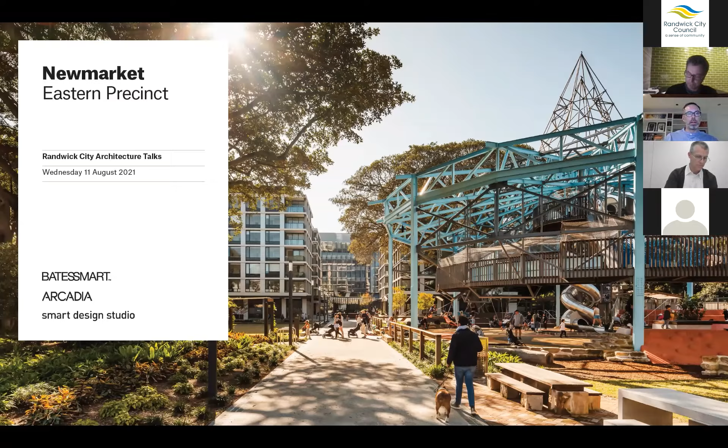Just bear with me. I'd also like, before I start, to acknowledge the traditional custodians, the traditional owners of country, in particular the Gadigal and Bidjigal peoples who traditionally occupied the Sydney coast.

I'm sure as locals, most of you will know the site reasonably well. For those that don't, Newmarket is the site of the former Inglis stables, just on the southern edge of the Randwick Health and Education Precinct. The hospital's immediately to the north, and you can see where we're in South Randwick, halfway between Moore Park and Coogee Beach. The site has an incredible history of horse racing and these magnificent fig trees, many of them planted over 100 years ago, and this equestrian history and the magnificent landscape really impressed upon us early in the design process.

As I said, we've been working on the master plan since 2016. This is a site plan showing the whole of the master plan, of which what we're talking about today is the first stage. Here you can see Barker Street to the north, Randwick Girls and Boys High to the east, Avoca Street just off the page there to the right, Rainbow Street Primary and Paine Reserve to the south of the site, and Botany Street running north-south on the left-hand side of the page.

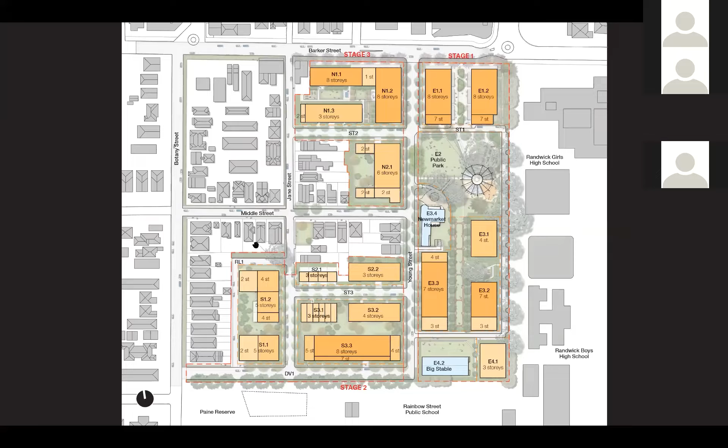The site was master planned in 3 stages. The first stage, coloured here, the Eastern Precinct, is the one that's been completed. That's what we're mainly talking to you about today.

The second stage, which you might have seen, apartments are currently being sold for, runs down the new street, Fennelly Street, to connect into Botany Street. The final stage, where the existing sales suite is, will come online in future years.

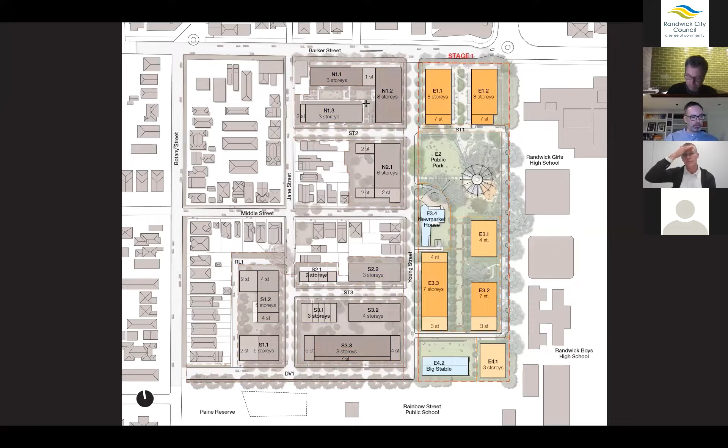I'm just going to take you through a few diagrams which shape some of the key moves of the master plan. This drawing is now turned around 90 degrees, confusingly, so this is just looking at the Eastern Precinct now. Barker Street is on the left-hand side of the page, and the Rainbow Street Primary is on the right-hand side.

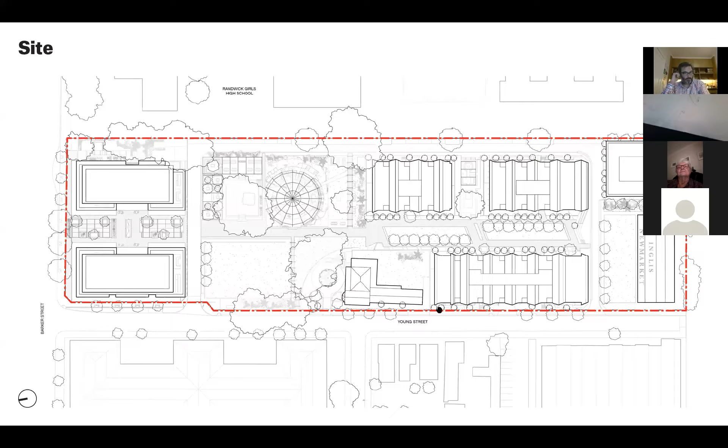The key things that really influenced our master plan thinking are set out on these following diagrams. The existing trees I mentioned earlier are all absolutely incredible, a mix of figs, a Norfolk Island pine, scattered around the site amongst the existing buildings. You can see those all coloured here in green.

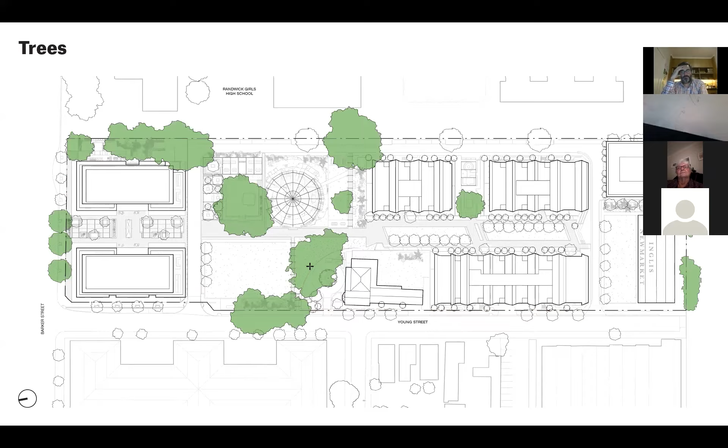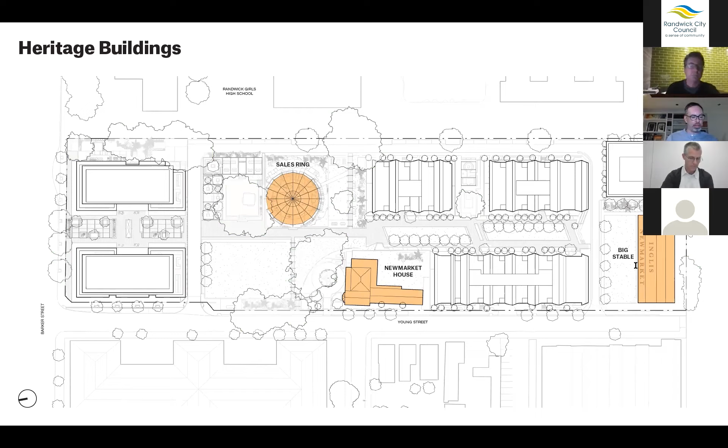There are 3 important heritage buildings within the Eastern Precinct. They're coloured orange here: the sales ring, which Alex will talk about in a bit about how that's been repurposed into a playground; Newmarket House alongside the new park; and the big stable down the south end of the site.

Down at the south end of the site, the third building, the big stable, is a magnificent space. For those who have been fortunate enough to be inside, it's a really expressive open structure. Council are currently working on what the future plans might be in store for that.

Going back to our diagrams, you can see here the same setup, the trees, the heritage buildings. One of the key planks of our master plan was how to get cars in and around the site and how to give addresses to all of these buildings.

So we proposed a loop road that comes between the park and the dining precinct, wraps along the eastern boundary and then returns back to meet Young Street alongside the big stable. This new street gives vehicle access to the front doors of all the buildings on the rear boundary and could in future provide further connections and openings into the schools.

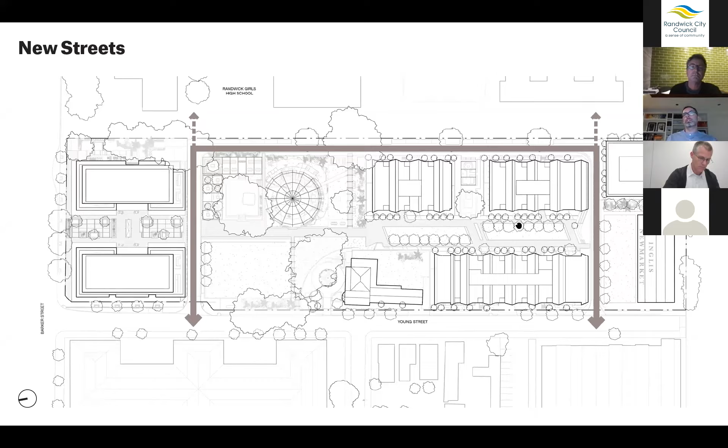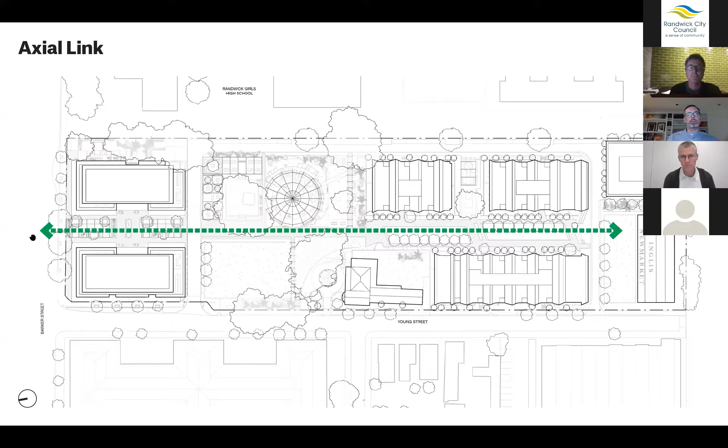That vehicular link is coupled with a strong pedestrian axial link, which provides a clear sight line through the middle of the site, all the way from Barker Street down to the big stable. One of the key moves of the master plan was using that link to provide a series of very different public spaces, each with their own character.

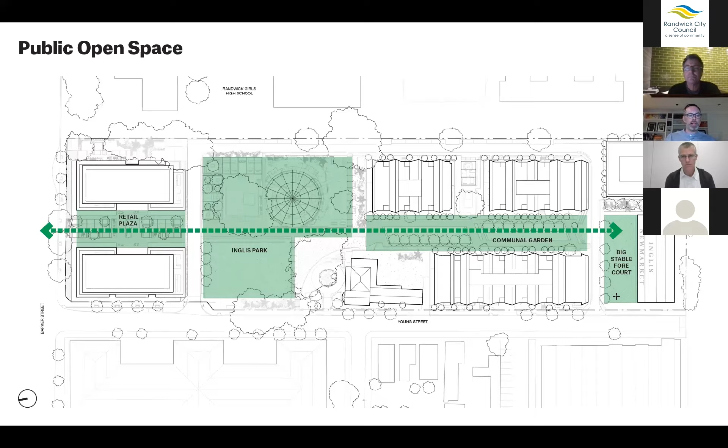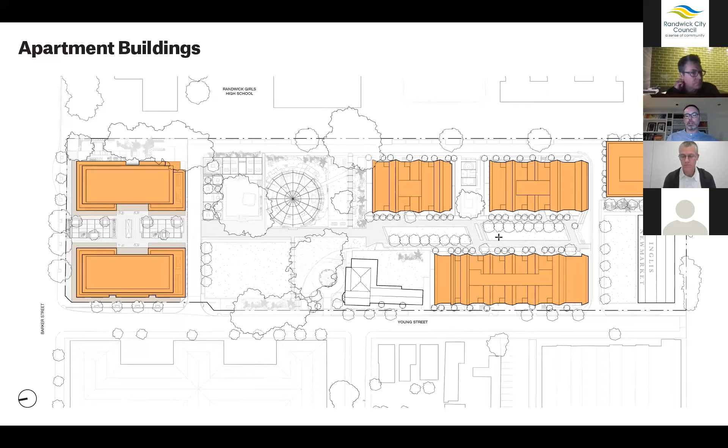And then finally, the massing of the apartment buildings on the site. What we did is arrange all the apartment buildings either side of that central axis, and then we reduced the heights of the buildings alongside all the heritage buildings to address those existing buildings in a more sensitive way.

Now, just before I hand over to Alex, who'll go through all the landscape spaces in a bit more detail, I just thought I'd give you a couple of images to put some of those master plan moves in context.

Here we are standing at the south end of the park, looking northward towards Barker Street. You can see the big stable in its current form on the right, and the dining precinct to the north. That's the sales ring playground Alex will talk to, and then just another example of where the heritage structures and the heritage trees have really been brought together and celebrated.

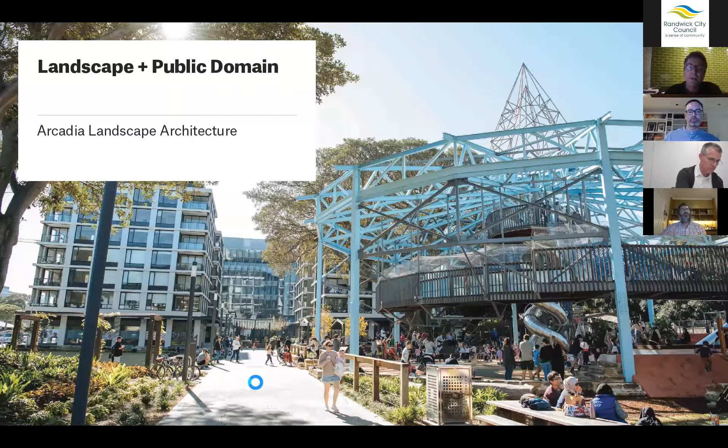Alex, can I just ask you to lean forward a little bit and speak up? Yeah, thank you. Right, yep. People are having trouble. That's it.

Right, thank you. As part of our design journey, we spent a lot of time doing research, and with the work of some historians and our own research, we started to unpick the very diverse amount of elements that sit on the site, apart from the three main elements in our first stage, and the variety of different equestrian uses that were so predominant on the site. As part of the construction programming and excavation process, there was a historian on site for the entire dig.

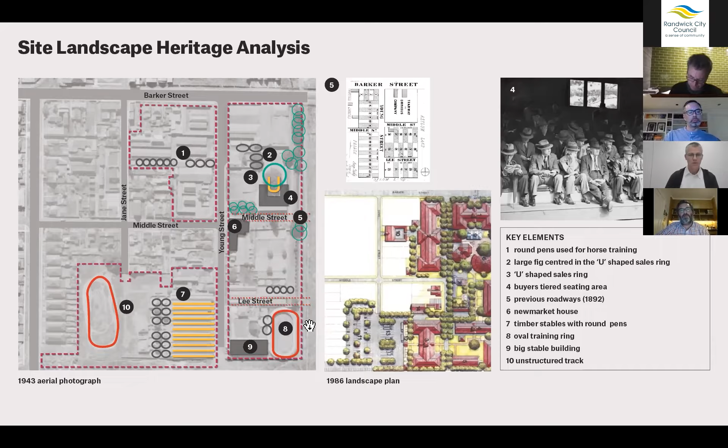That's where some of the bricks you'd be familiar with on the site were discovered. Down here in number 8, at the bottom right-hand side of the page, as an example, some 1 meter below the existing level, we discovered that red ring actually had buried bricks down there, some of them even containing convict stamps. So all these heritage elements became very important for us to discover and then reinterpret.

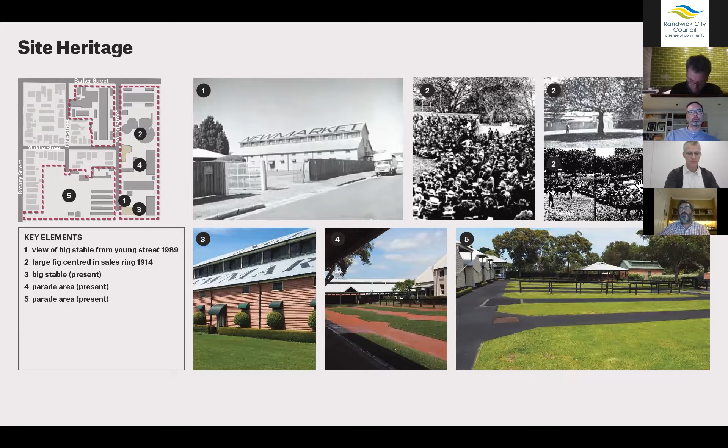Part of that is the architecture and the typical architectural form that the stables had driven out. The parade grounds are also a significant element of what the equestrian heritage drove out. And then, probably the most significant heritage item on the site, in our opinion at least as landscape architects, is the central fig that sits now proudly in the middle of the park and is its cornerstone. It was planted over 112 years ago, and it's witnessed the sale of every horse ever paraded within these grounds and sold under the hammer. So its structure within the park was essential to really celebrate.

Notwithstanding that, the Inglis's, whilst the site was contained and fenced and only for private use the majority of the year, when those fences opened up and the public could come through, their home and garden became part of the public space for those few days of the year. But also importantly, what was very noticeable was that whilst fences surrounded the perimeter of the site, they always visually allowed for permeability to come through.

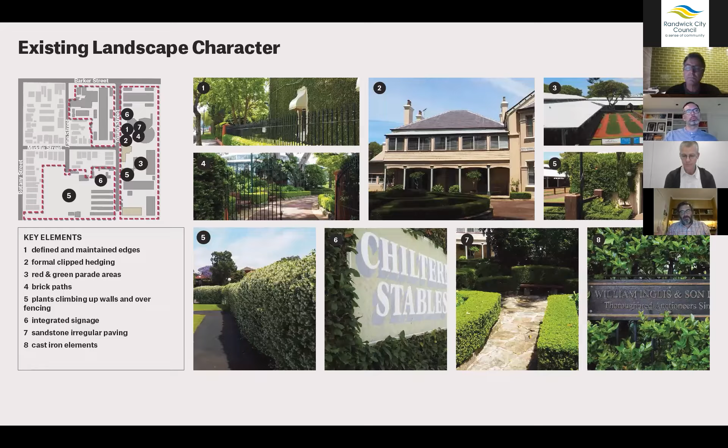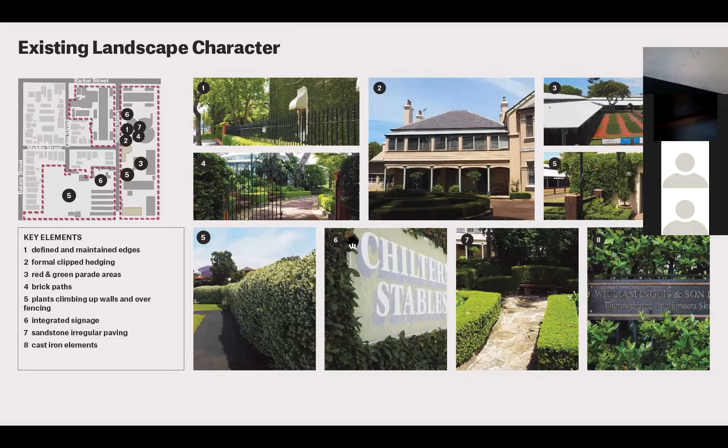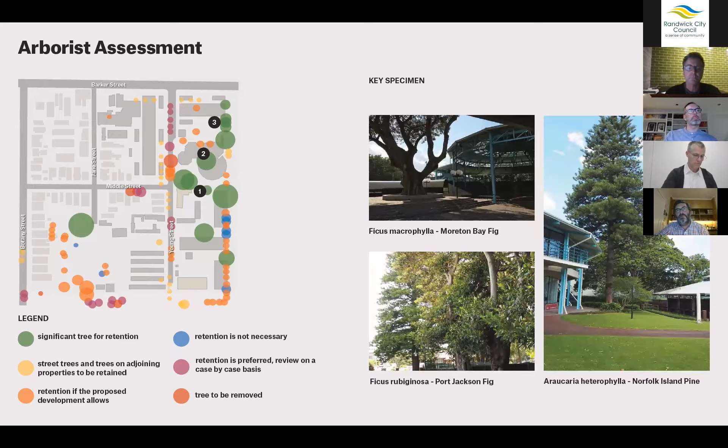Matt touched on the existing trees scattered around the site. There are 15 heritage listed trees, a mixture of figs and Norfolk Island pines. Every one of those has been planned to be retained. We've stepped basements around them and done everything possible to ensure the planting allowed for their retention, so these iconic components really became cornerstones of the overall development.

From a master plan level, we looked at probably four main pillars. The connections, both pedestrian and vehicular - there's a series of new roads that come through the space. Accessibility - believe it or not, there's something like a 1.5 metre fall from Barker Street down to the park, and even through the retail zone there's a reasonably tricky fall. So making sure we didn't impose handrails through there was part of our design process.

Obviously the heritage reinterpretation took on a very important part of the design, creating a defining character that not only tied the site together but created a new precinct for Randwick. We are in quite close proximity to the Spot and to Randwick Junction, and we needed Newmarket to take on its own life and its own sense of place.

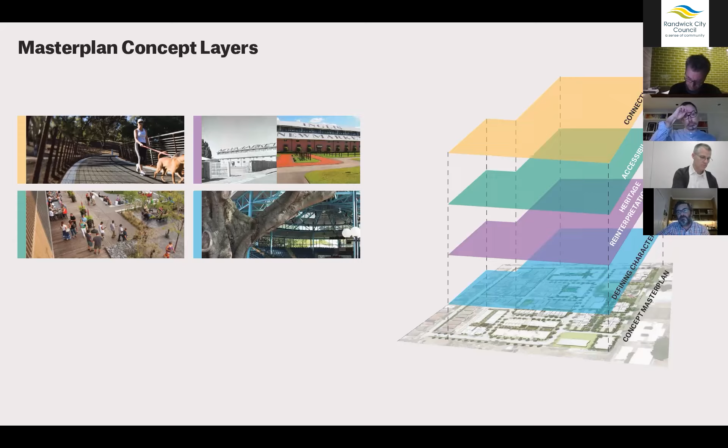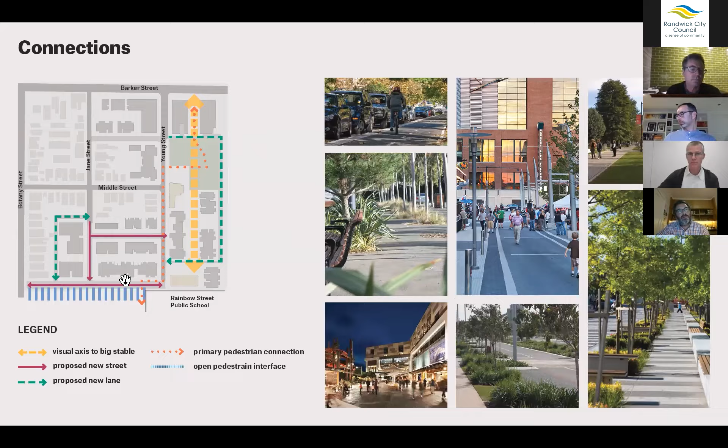In terms of connections, we have this main pedestrian spine that heads from north to south through the centre of the site, which is really how we see the public navigating and enjoying the different types of amenity. There's the new road that loops around stage 1, and on the stage 2 side we have the new roads in purple that have already been constructed, which you may have driven around yourselves.

In terms of the spaces, the blue here signifies publicly accessible open spaces, and I think it's a credit to the developer and their position in reinforcing and encouraging the publicly accessible components to this site. It's not very often that the areas between buildings, say for Williams' component in E2, 3 and 4, would be open to the public in the nature that they are. But it has allowed the landscape to flow quite naturally while creating significantly unique spaces - the heritage components, and the semi-public accessible spaces in front of the existing big stable.

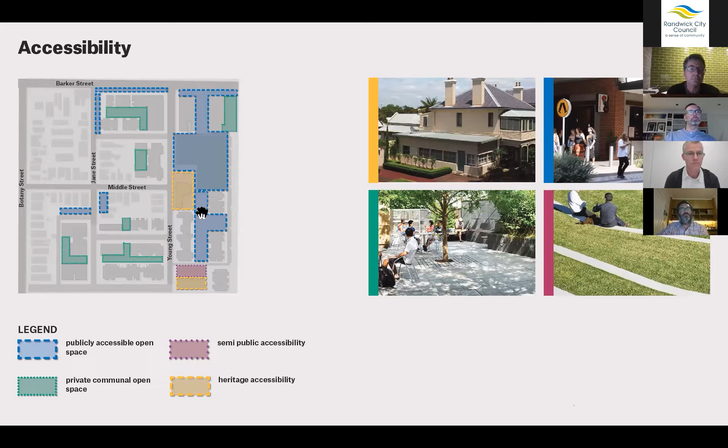In terms of the heritage interpretation, we were blessed with probably five main elements that we really enjoyed working with: the architectural forms, which we adopted as part of our ground plane treatments and definitely the structures that sit within the park.

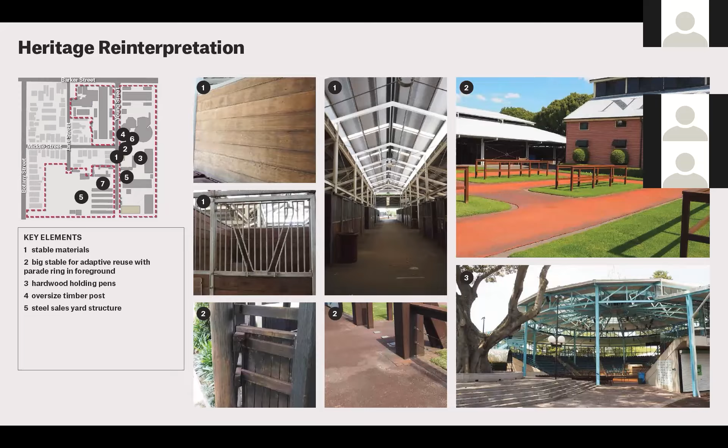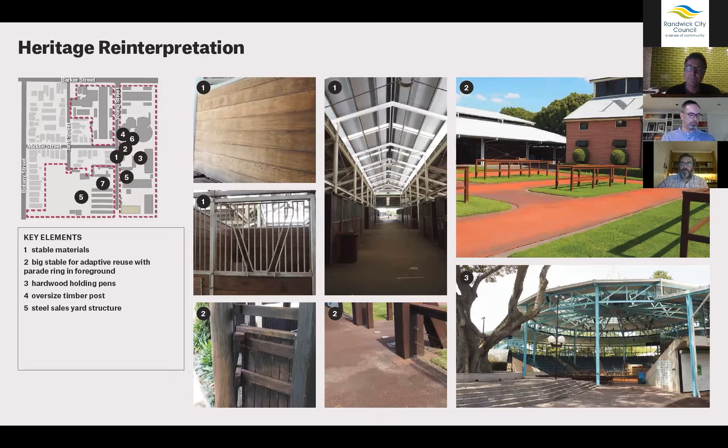The timber was a very strong component of the stables that existed, both the old and new stables, which was salvaged and recycled. The bricks from the stable floors where the horses walked were all salvaged too. Then as part of the civil works within Young Street itself, during removal and upgrading of the curb and guttering, council requested us to replace the gutter but retain the old sandstone heritage curbs. We picked up almost 1.5 kilometres of this sandstone, which allowed us to introduce it into the framework of the park itself, which you'll see later on.

Placemaking and activation - we've got a very busy pedestrian driven Barker Street with high velocity traffic getting in and around Randwick, but also leading to the hospital entrance directly across the road, universities down the street, and local schools, coming through into the middle of the two buildings on Barker Street, where we have these focused social zones that then bleed into the park.

We'll explain how our thinking was approached there in terms of not having the park and that retail component be two isolated elements - we wanted to stitch them together so they'd be expansions of one another. The community gathering and recreational space is the big lawn in the middle, and then the local shared spaces are scattered around in the blue.

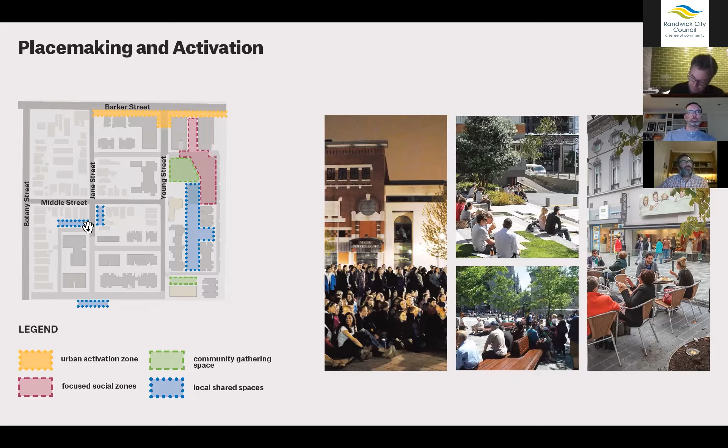Vegetation character - so this is really just looking at the different approaches to the central park and social spaces versus Young Street and Barker Street, and then the new streets that have been planted up.

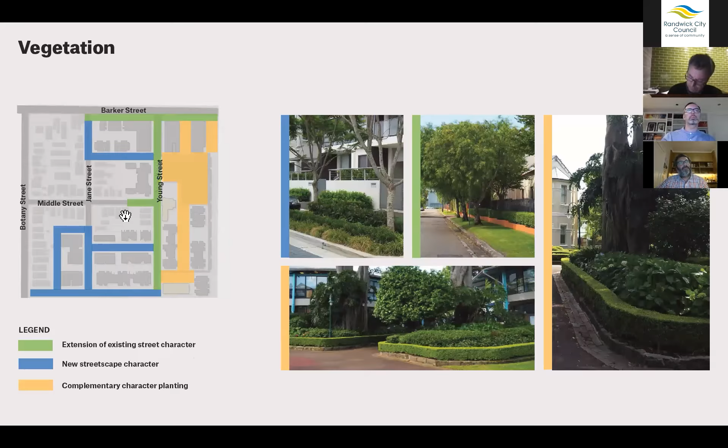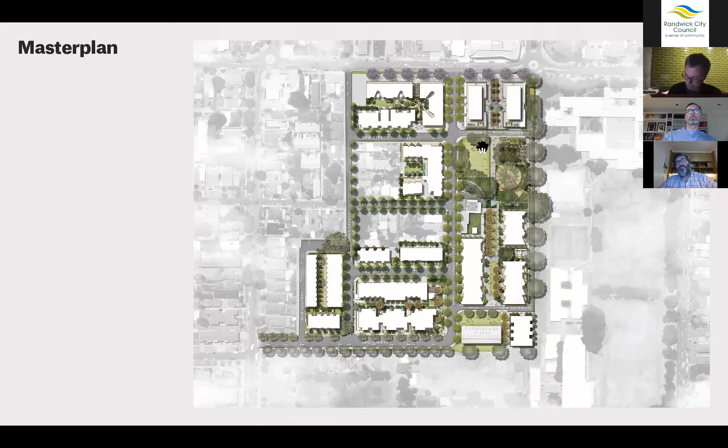So this is the master plan as it sits today. You'll see in some of the future slides the actual form of the plans at different stages of our design development. I think it's important for us to acknowledge as designers that what we present at different stages isn't fixed in concrete. For good reason, through collaboration with council and other designers that come into the project through its life cycle, there's an evolution. This is pretty true to what's represented on the site today, and you'll get an understanding, especially around the park, of where some of the line work has evolved in the future stages.

So on E1, the retail precinct itself, there are really two main components. There's the publicly accessible component on Barker and Young Street, where we've provided pedestrian connections as a primary driver, and tried to create really high quality al fresco dining amenity with the use of shade structures and the like that would allow the success of the F&B retailers to spill out and activate those edges well.

The central food and beverage precinct worked quite heavily to make sure that whilst it serves a purpose for the retailers to expand their floor plates and trade, providing service and amenity to customers in an outdoor experience, there was a significantly high proportion of public amenity so that diners, say getting a burger from Cafe Mackenzie, didn't feel excluded from using this space. The furniture layout and fixed furniture assisted us in making sure the spaces aligned with different retailers are very clear - they dress those themselves every day, bringing in their own furniture and character. But the rest of the amenity is clearly for public use and general public amenity, allowing people to come through so it's not an exclusive place just for dining.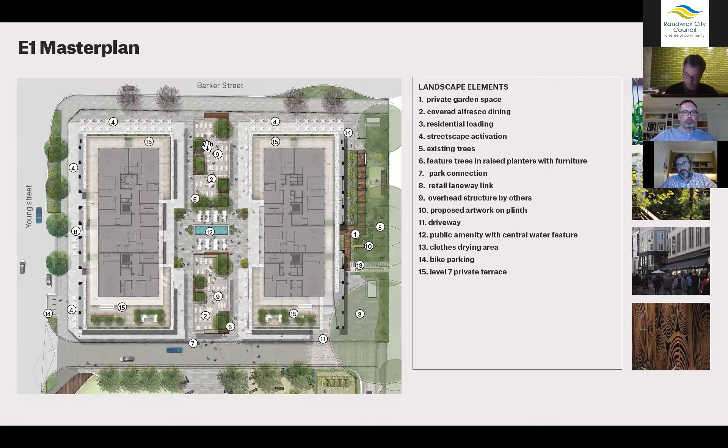The awning element over the top, I want to make some reference to, because Arcadia - whilst we were involved in the planning of all the seating and everything underneath it, we collaborated, but mostly it was designed by HDR. For the public, to understand what it signifies - the cones underneath it are the horseshoes, and the movement underneath represents the sand dunes that once occupied the site. So there's that touching back on First Nations people's knowledge and experience of the site, using it as a very modern, slick element that provides fantastic amenity for diners in all seasons.

And as the Inglises start to come into place, there are some colours of the horses. What's important about that is this isn't a place where jockeys or trainers were celebrated, that's the track. This is where the horses were sold, so it's representative of the studs, I suppose, of the industry, and those colours represent the studs and racing colours the horses then went on to use. As part of that interpretation, each building has been aligned with one of the predominant horses that Arthur Inglis and his family assisted us in selecting, and they're scattered throughout the ground plane of this landscape.

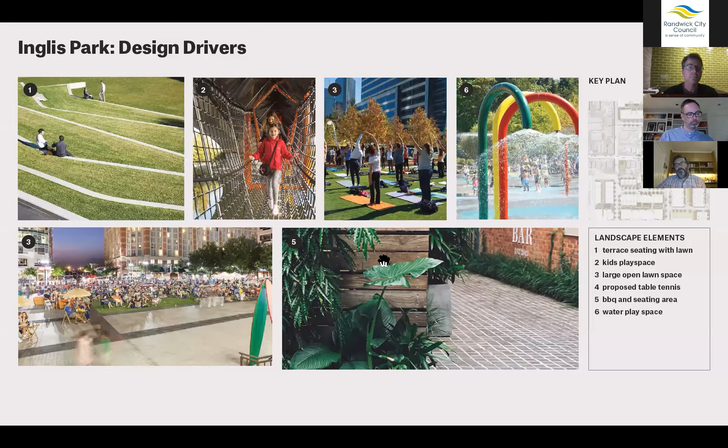So if I come into the park itself now, the design drivers were basically to create a large lawn space that provided passive and active recreation, a place for kids, a place for flexible community gatherings, barbecue amenity, and an extension of the food and beverage area, and then general play.

Within the site, the main drivers were these fantastic canopy trees that existed on site. We have the main fig that sits in the centre of the site. Adjacent to the Inglis house there are two other figs sitting within the park itself, providing amenity to the house and that edge of the park. The standard camphor laurels are along Young Street, then other figs on the edge of the school, and just to the south this smaller lighter green symbol represents the Norfolk Island pine that's on the site at the moment.

The structure of the site itself, when we first saw the sales ring, I'd actually seen it for a fair few years before, but Mike, my business partner, and I looked at it, and it was the biggest puzzle of what we could do with it, but it had such a strong presence that it needed to remain and be retained in some form.

And I think whilst it's been discussed as heritage, I wouldn't say that it's got architectural heritage value, but in terms of its cultural value and cultural heritage, it holds a great deal of importance, especially to that community that had passed the baton on to the next group. So retaining that for us was very important.

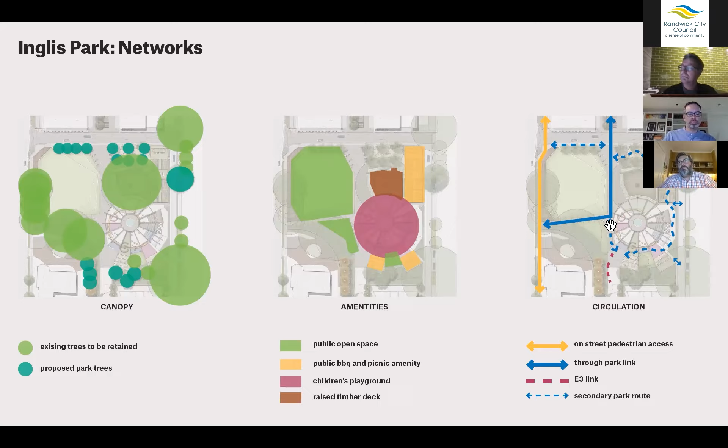Not without saying that the circulation in and around the space is very important. One of the challenges we had was to retain the structure, and some of those bleachers that create the elevation and height, was ensuring that we provided a safe space for all days of the year and all hours of the day. And whilst the lighting does some form, I think we've opened it up significantly so that there's no little nooks or crannies for any sort of opportunities for predators of the like either.

So we've got the main pedestrian spine, I think it's 4 meters in width. It connects the north to the south, but also this east-west connection that comes off Young Street and sits right in the centre line of the axis of the centre of the play structure.

The raised deck around the FIG itself. The FIG sits at a slightly higher level than the adjacent surfaces, so we needed to treat that with its due requirements to make sure it had a healthy and well aired soil base.

And then wrapping around that is the L-shaped food and beverage or park dining amenity. And the first one that runs on the east-west axis adjacent to New Shareway is what we envisaged to be, and it's funny how things work out for you, we saw that being the spill out space. People would go to the different restaurants with their friends, and someone would go to the dumpling place, someone would go to the cafe, someone would go and get a slice of pizza from Barca, and they'd all come here, grab a bottle of wine from Stella, and sort of sit there.

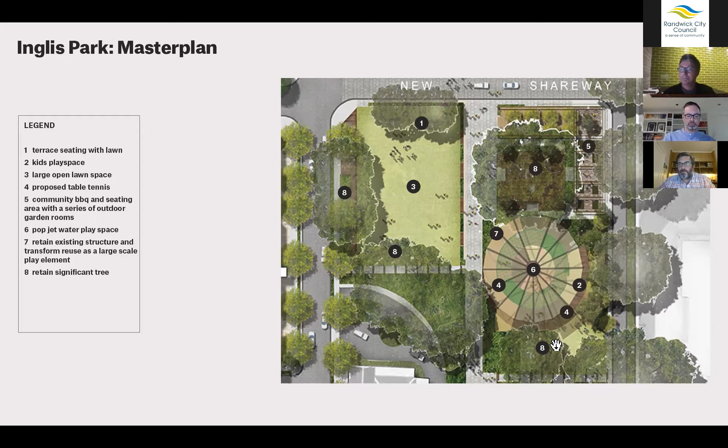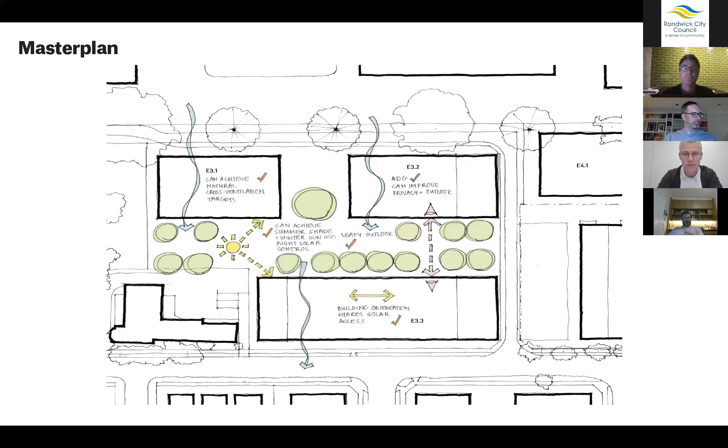Good evening, everybody. I'd just like to present a little bit about the Fig Tree Pocket. The project really started with us being very mindful of the amount of amenity available on this site and how we could connect in with the gardens.

What we were really thinking about is the rising sun in summer and winter and how you could use that and the architecture to control the amount of summer sun coming in, to limit that, but to allow the winter sun in.

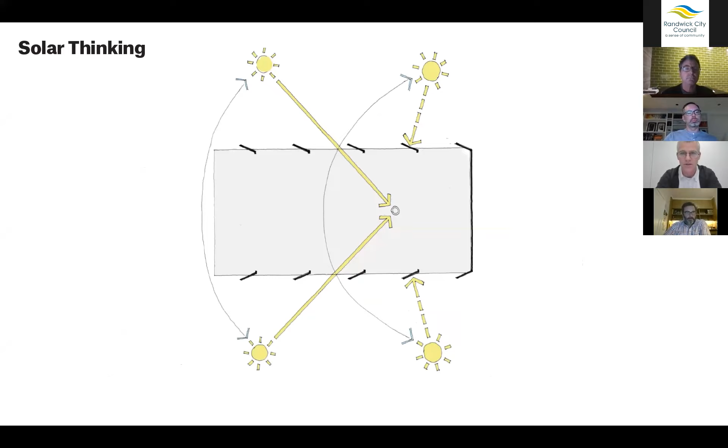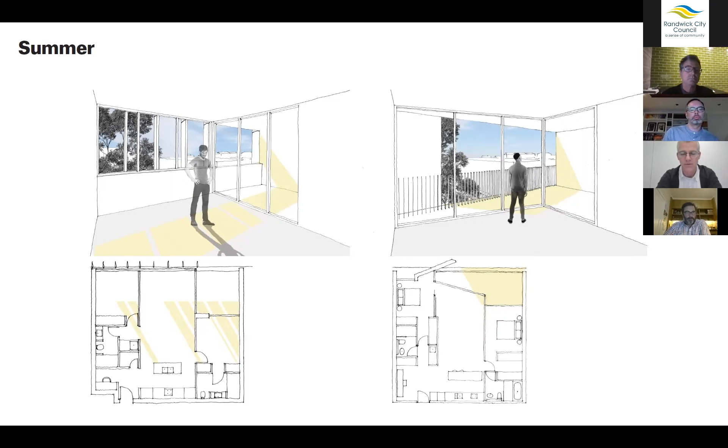This is a diagram comparing a normal configuration where you'd have western facing glass and some louvers, versus this configuration where we use big solid blade walls to shade the sun. In summer, those big angled walls prevent the living room from getting sun on the glass in the afternoon. Then in winter, it works the other way because the sun sets further north in the sky, so the setting sun comes into the apartment, giving more sun in winter, less in summer.

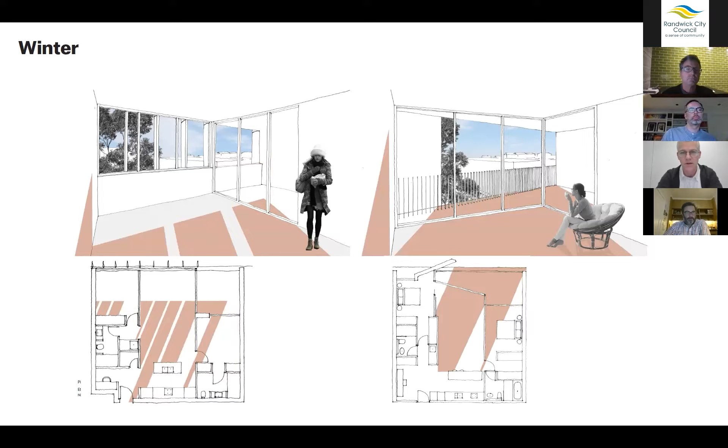We used that to drive the architecture and coupled it with an idea of privacy, and how to enhance privacy between apartments that were looking towards each other. So these angled blade walls directed your views down the gardenscape towards Barker Street.

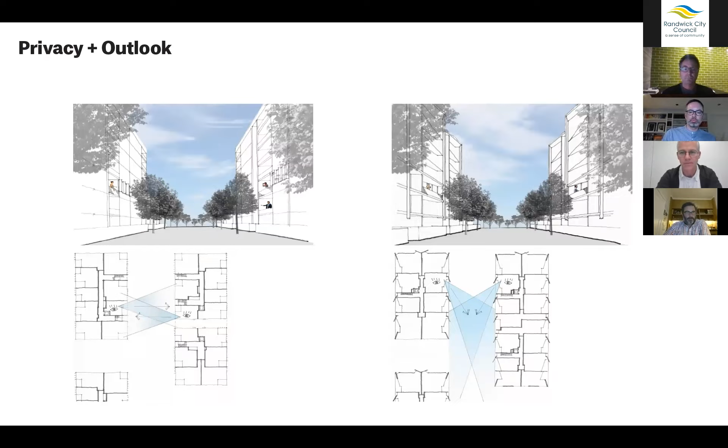The angled blade walls you can see form the architecture, and as well as that, the master plan had heights of buildings at different heights. Some of them were 7 storeys, 3 storeys, and 4 storey elements. So we angled big blade walls towards the north to control the sun and the privacy.

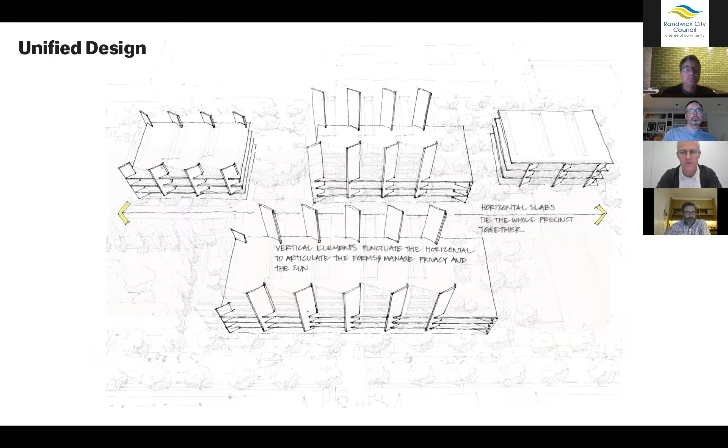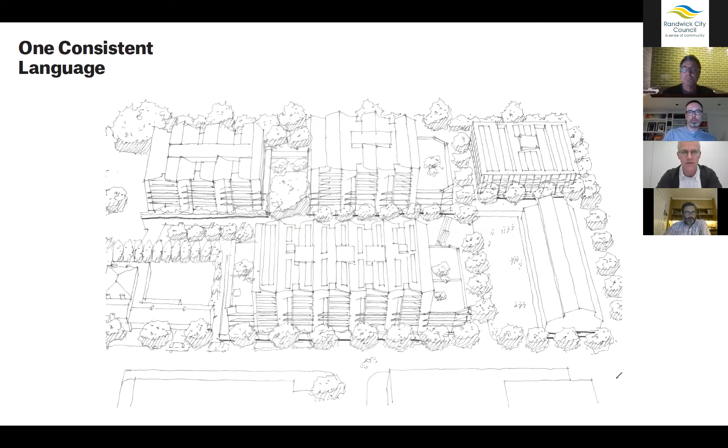This is an early sketch from the concept stage where we saw that direct expression of linking everything together and the solar control would create the architecture. It was one consistent language that ran through everything, that drew its heights from the stable shed to the south and also to the house to the north.

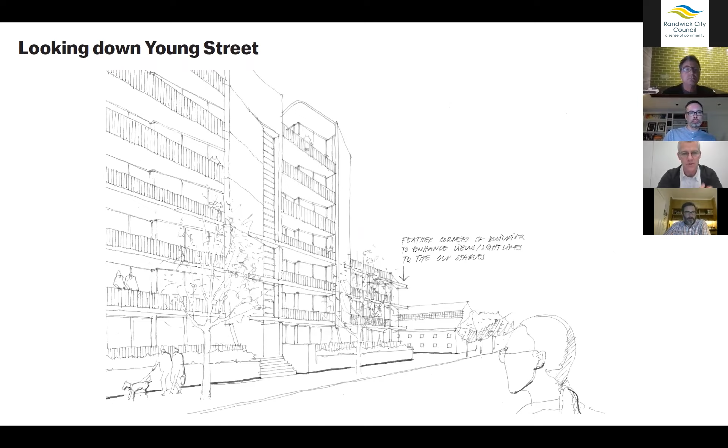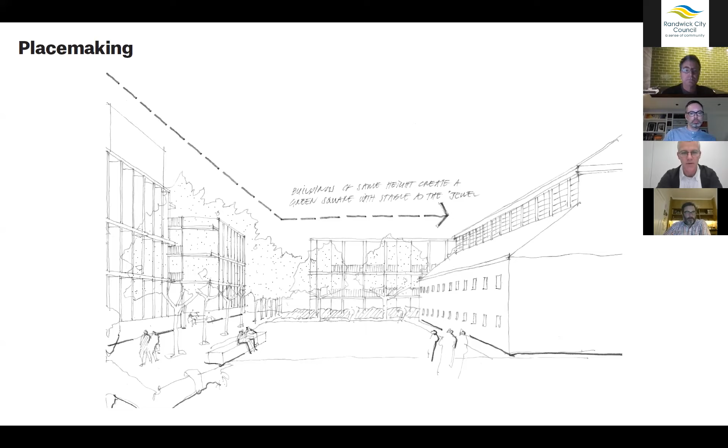These were early sketches, just talking a bit about the opportunity through there that the balconies would give depth to the architecture, so it kind of feels alive and deep, and how we would establish relationships to adjacent buildings so that, in particular, this lawn space to the north of the old stables would become a really beautiful space to be in that's both sunny and appropriately scaled.

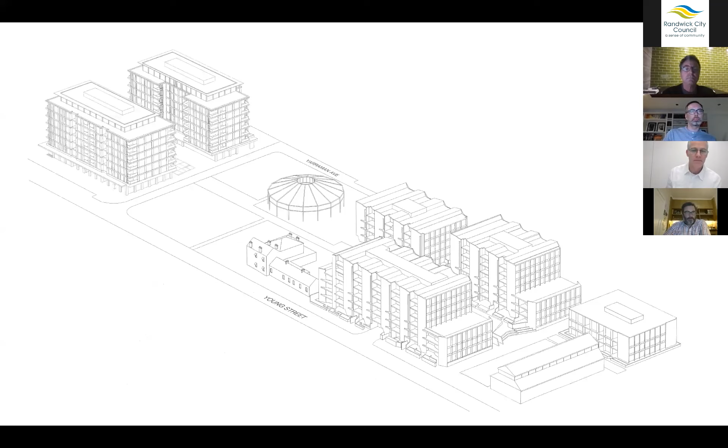And then looking to the north on that, these were early sketches again on how we would try to unite that. And then looking at the whole master plan as we developed that up in CAD, and then the building from above.

So what you can really see through here is a polished concrete set of slabs that are vertical, that wrap up and over and become clerestory windows on the high level, and the in situ concrete horizontal slabs that unite all the buildings together.

From the north, the building presents as very open because it's really facing this way that we want to let that winter sun in. From the south, by contrary, it's quite different, so it's much more enclosed, and we're using that big solid wall to shade that summer sun coming into the apartments.

And then on the north and the south, we have an expression of a brise-soleil, which is really used to control privacy and sun coming into those glass facades. A similar language is adopted to the central space, but these angled walls give you privacy between the units as well, because it directs your view down towards the gardens and the public spaces on the north.

And then in the central garden, which was conceived as a garden rather than a public place, it was intended to be a quiet, calm space, and for that to be very different to the more active areas towards Barker Street, we really had an opportunity to make that open to the public. So it opens during the day and then closes off at night.

And every time we built stairs and ledges, we were really thinking about places for people to sit and drink a coffee or just to take a break.

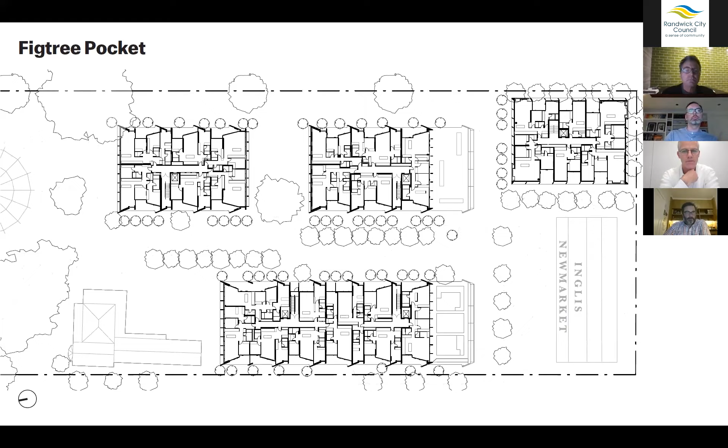To achieve cross ventilation, we split a couple of the buildings into 2 cores, so they separate, so you have through units at the center of the building. And then as you go higher through the building, shorter forms stack up through there.

And then this is one of the smaller buildings. This one is 5 stories high, whereas the other ones are 7. So a single element that's 5 stories high, and you can see the expression adapts to the south and the north sides.

And then looking at that building from the northern end and how it interfaces with the park around the big fig tree.

Each of the buildings was the same material palette, but had a different colour trim. So the balustrades and windows were different. The one on the left is a very dark green. The one on the right is an aubergine colour.

And we drew all those colours from the neighbouring buildings. It's hard to see, but the slate roof to the old house is a very similar colour to the purple, and we tried to match and complement the existing elements around there. We then tied it back into the colours for the interiors, which were related to the horses, after which the buildings were named.

This is a smaller building out the back, which is very simple. The brise-soleil details were all made out of precast concrete with a polished finish. For us, it's really important to think about how those elements come together and are expressive.

Signage is integrated into the project, and the connections with the public domain are really critical. This is the space between two of the buildings, which is a gathering space for the residents of the building, with barbecue facilities here.

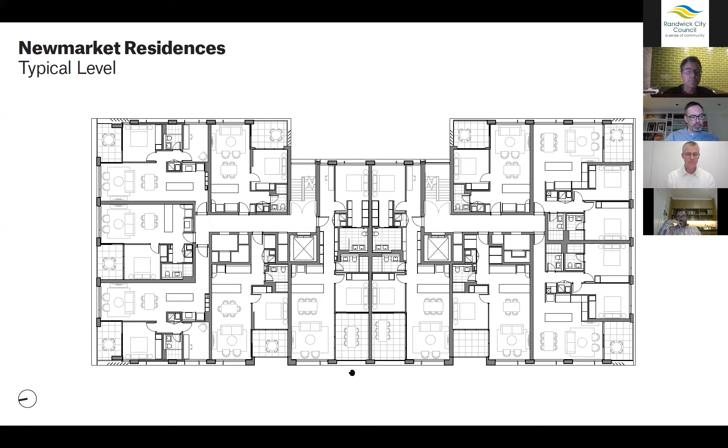We've used the balconies to break up the form, with balconies on the corners where the corner of the frame is missing. We've also got these recessed balconies which break up the length of the facade, making the long facade building read in three parts.

Here I've just zoomed in on the southwest apartment, in the bottom corner of the building, looking at it in a little more detail. Here you can see the repeating window bays and corner balconies, giving a real sense of openness and connection to the outdoors. From the outside, that's that apartment we were just looking at.

Here you can see one of those building breaks with the recessed balcony, breaking down that length of that overall facade.

The shading is achieved subtly differently on each of the orientations. This is the northern facade, where the concrete slabs are extended outwards to provide horizontal shading, which keeps out the summer sun and lets in the winter sun. Whereas on the western facades, these angled louvers in the same tone as the precast concrete provide that protection from the setting western sun.

Here you get a sense of the building's expression of those repeating precast concrete bays, the open corners, and the play of different elements - picture windows, fins, and so on. Here's the view of those picture windows within the apartments, and the corner balconies opening up into the treescape of the park to the south.

The ground level is defined by the new dining precinct, which I'm sure a lot of you are familiar with, which connects Barker Street through to the park. 12 different retail tenancies activate all those frontages, while the compact apartment lobbies connect through from the street through to that central space.

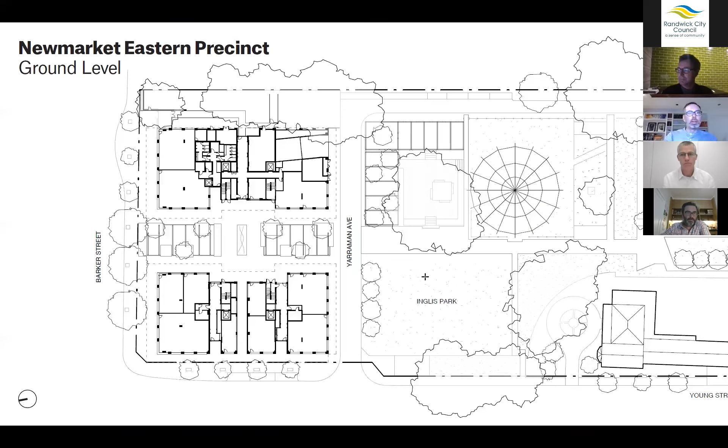There's a plaque with a bit of information about the history of the horse there. Here you can see that linear lobby I showed you in plan, which connects the external space all the way through to the plaza on the other side of the building. The interior design of the lobby picks up the framed expression of the building on the outside.

And between the two buildings, the retail plaza provides that north-south connection, the outdoor dining spaces, and that public seating available all day that Alex described earlier.

Here, the building architecture comes to ground with those precast concrete columns coming all the way down and forming framed bays, which the retail tenants occupy. Those framed bays allow the tenants to spill out into that open space between, into that north-south link.

And it's in that link that the horse racing history is celebrated again. These are the plaques Alex was referring to earlier, with a bit of a timeline of what's happened on this site in the past, and the jockey silks of some of the famous horses celebrated in inlays in the ground.

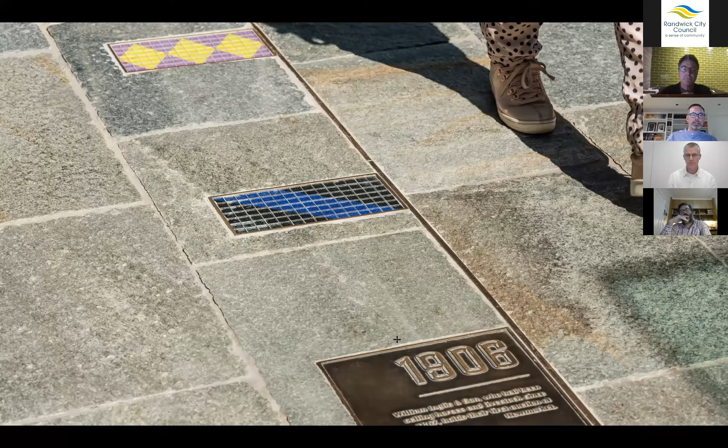The central canopy, which Alex showed you earlier - here by day you can see the horseshoes and the undulating plane he described, designed by HDR, a real playful element anchoring that space, with a really lovely atmosphere in the evening.

I think, in conclusion, one of the great successes of this project is how the ongoing and iterative collaboration enables the whole precinct to talk together. As we said at the start, it's been a long journey, and it wouldn't be the project it is without many collaborators. That started with the Inglis family. We came on board after an initial master plan had been drawn up, and we worked really collaboratively with council and the design review panels over the years.

While Alex and I were working on it from day one, when William and his team joined the project a year later, that just brought a new energy to the project.

In terms of the architecture, I think that collaborative relationship is best exemplified by the related but distinct concrete facade expression. This is our precast concrete frame in exactly the same material as William's on the other side of the park, with a different expression, a different treatment, but buildings that are complementary to one another in an incredible landscape setting which Alex and his team has put together.